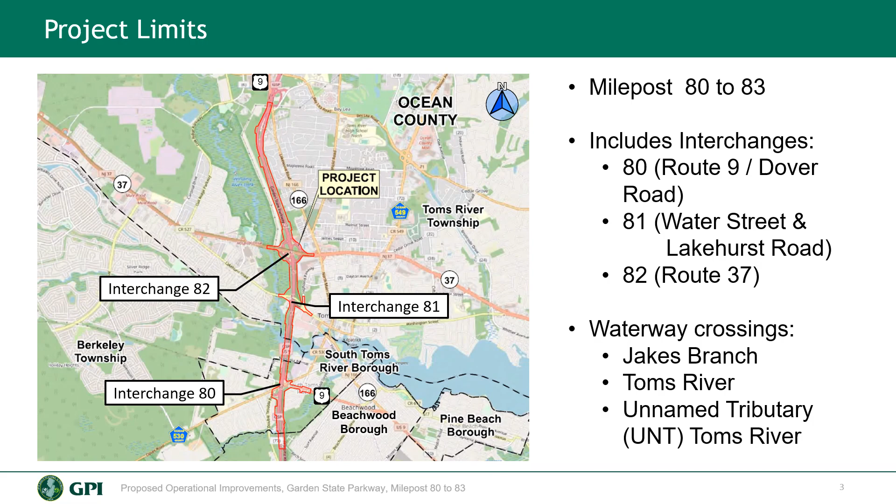The objective of this project for the authority is to improve accessibility, safety, and travel time along the Garden State Parkway. This is being achieved by providing full access to the Garden State Parkway at Interchange 80 with 2 new ramps that do not exist in the current condition, increasing the capacity and eliminating substandard weaving conditions of the Garden State Parkway mainline, and correcting substandard design elements that exist within the corridor.

The corridor has several needs in the existing condition. The Route 9 local road traffic combines with the Garden State Parkway traffic at Interchange 80 within the project limits and separates where the project ties in at Interchange 83. Local traffic needs to have a separate roadway from the main line of the Garden State Parkway. Congestion along the Garden State Parkway mainline, ramps, and local roads needs to be addressed to improve movement through the corridor. In addition, there are insufficient weaving lengths on the main line and between the closely spaced interchanges.

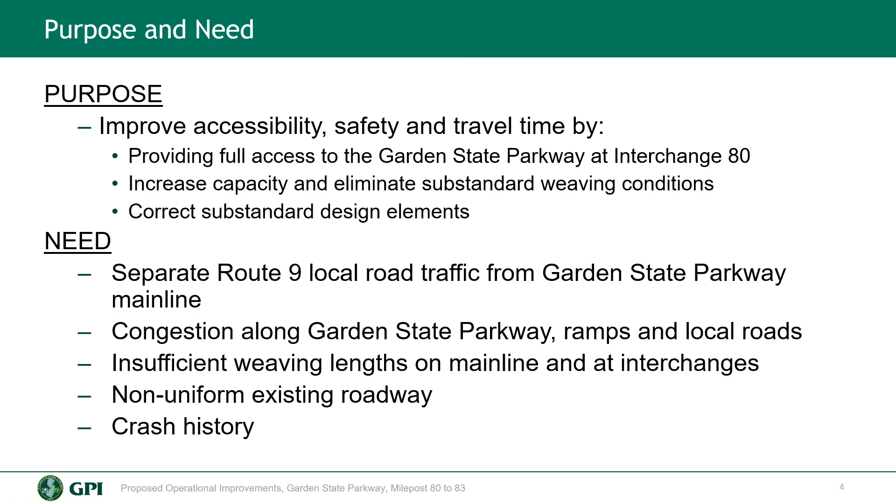Geometrically, the shoulders, median, and lane widths are inconsistent from the Garden State Parkway to the north and south. Lastly, the crash history in the corridor is above the statewide average, contributing to operational concerns. Continuing with the project need are the existing deficiencies that do not meet the design standards of today, since the corridor was originally constructed in the 1950s.

The shoulder widths are typically less than the authority's current standards and even non-existent at some locations. The roadway geometry and connecting ramps have several existing deficiencies, including stopping sight distance of vertical curves, cross slopes, and superelevation rates. The acceleration and deceleration lane lengths are insufficient between the closely spaced interchanges. Bridge clearances are deficient, including the vertical clearances under or over the Garden State Parkway and the width of the crossing roadways.

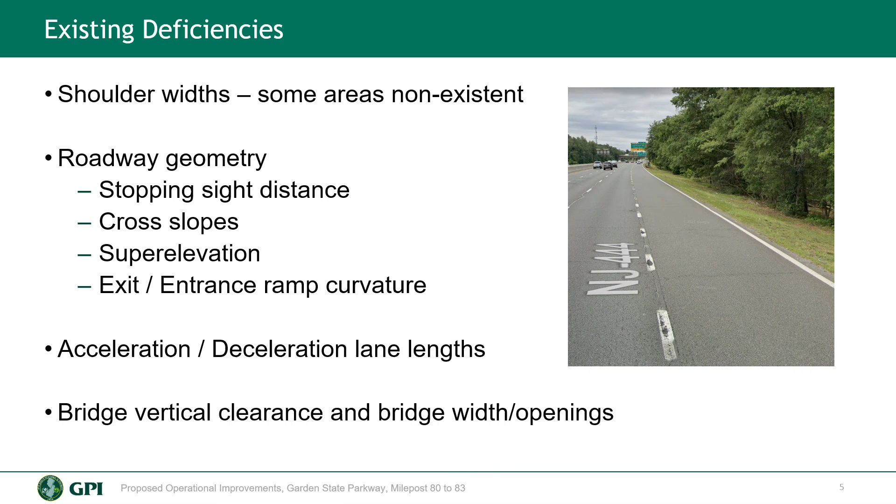The project team is actively coordinating with project stakeholders to account for other projects nearby to help contribute to the success of this project. There are projects underway led by a private developer, Toms River Township, and Ocean County that have been considered. Near Interchange 80, there are planned intersection improvements at Dover Road and Double Trouble Road for a nearby private development along Railroad Ave that are being coordinated.

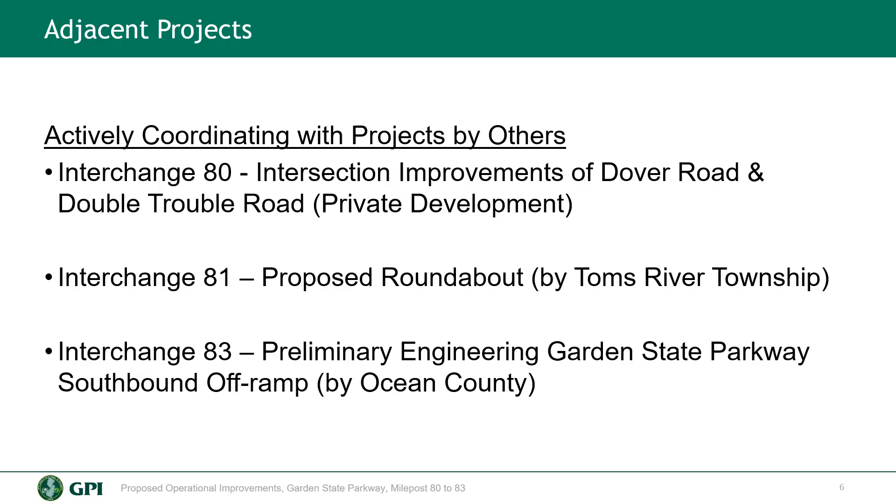At Interchange 81, there is a proposed roundabout being considered by Toms River Township at the intersection of Highland Parkway, Water Street, Lakehurst Road, and the Interchange 81 Parkway exit and entrance ramps. At Interchange 83, the project team is coordinating with Ocean County on a project in the preliminary engineering phase to construct a new Garden State Parkway southbound exit ramp to Indian Head Road.

Now for an introduction of the proposed improvements planned for this project shown on the overview map of the initial preferred alternative that has been developed alongside the other locally led projects mentioned earlier. The design team has prioritized operational and safety improvements and developed a design that includes separate collector-distributor roadways in each direction, extended auxiliary lanes, upgraded exit and entrance ramp speeds, widened substandard shoulders, and 2 additional ramps to complete the missing traffic movements at Interchange 80.

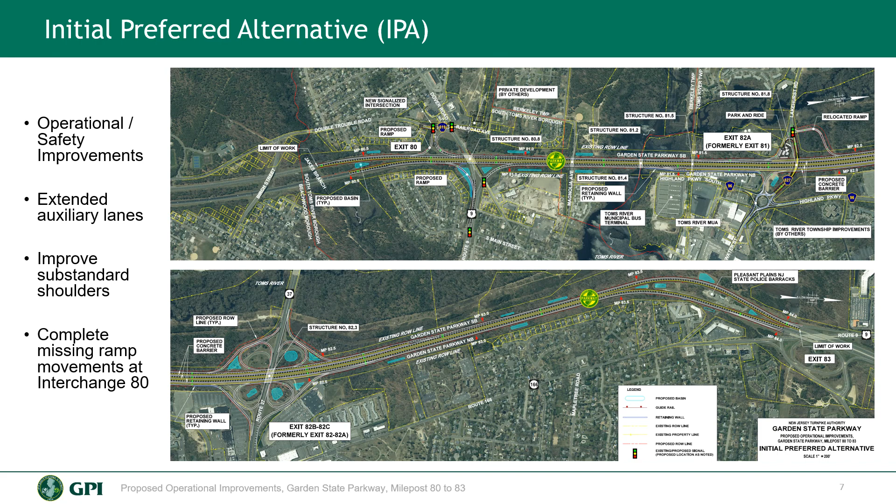One main goal of the project is to improve the Garden State Parkway to meet current standards. These include geometric improvements to roadway curvature, improving sight distance, rehabilitation or replacement of 11 bridges, guide rail replacement to meet current standards, and upgrades to signing, striping and lighting. Stormwater management, including 23 basins and 9 manufactured treatment devices, will be established to control site runoff.

There are extensive utility relocations required to construct the initial preferred alternative. The majority of these are located at the interchanges with the crossing roadways. Right-of-way acquisitions will be required, but minimized to the fullest extent so as not to significantly impact the local community. There are small or partial takings.

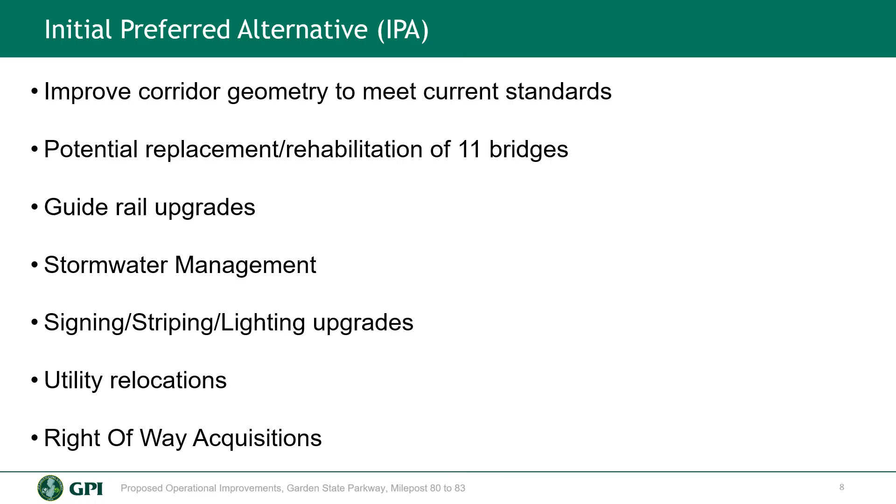These graphics show the proposed cross-section of the roadway in relationship to the existing roadway conditions. These are 2 representative sections within the project limits. The graphic at the top shows the area between interchanges 82 and 83. As you can see, the proposed condition widens to both sides of the existing roadway, providing for standard left and right shoulders, and an added 4th lane as an auxiliary lane to run continuously between interchange 82 and 83 ramps.

The lower section shows the roadway between interchanges 81 and 82, where the collector-distributor roadway has added lanes separated from the Garden State Parkway by concrete median barrier to improve traffic congestion and weaving on the main line. There is considerable embankment fill and pavement widening required on either side of the Garden State Parkway. The northbound collector-distributor roadway will have 1 through lane with 1 auxiliary lane, and the southbound collector-distributor roadway will have 2 through lanes with 1 auxiliary lane.

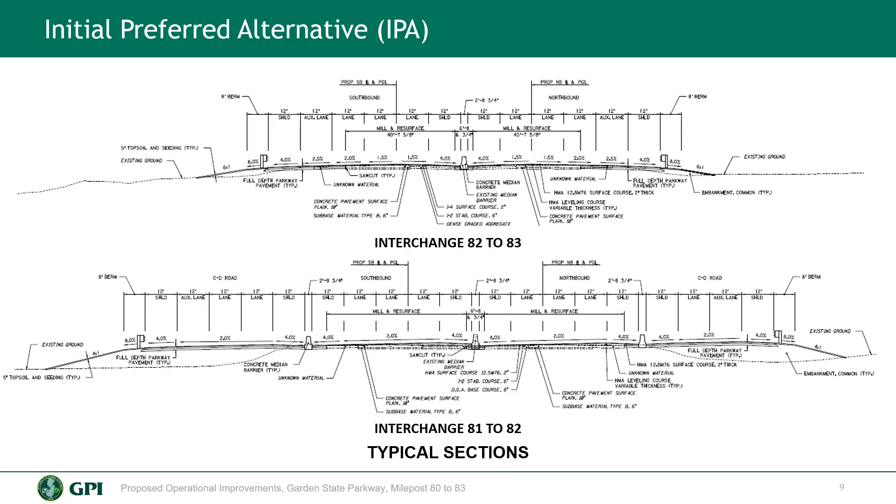In order to provide a compliant collector-distributor roadway adjacent to the Garden State Parkway main line, the interchange ramp numbering system will need to be modified within the project limits. FHWA's Manual on Uniform Traffic Control Devices, or MUTCD, requires that all ramps exiting and entering from the collector-distributor roadway utilize the same number, considering all the ramps as part of a single exit. For this reason, from south to north, the existing 81, 82, and 82A designations will now be 82A, 82B, and 82C in the final constructed arrangement. There will be no exit with the designation 81 in the future.

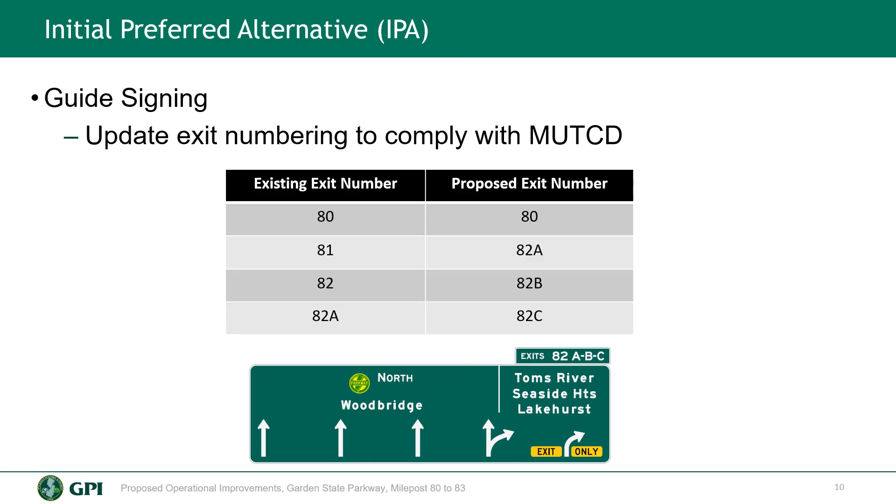Shown here are the proposed improvements at Interchange 80 in more detail. Along the northbound Garden State Parkway roadway, there will be a newly added northbound exit to Route 9 southbound to provide access to points east. This new ramp will bisect an existing stormwater management basin, which will be reconfigured to maintain its effectiveness. The existing northbound entrance ramp will be widened from 1 to 2 lanes to access the Garden State Parkway. These entrance ramp lanes will continue as auxiliary lanes and provide access to the mainline Garden State Parkway and to the collector-distributor roadway.

To improve the operation of the signal at the intersection with the northbound entrance ramp, Dover Road westbound will be widened under the Garden State Parkway to accommodate 2 travel lanes beyond the signalized intersection, thereby reducing the green time required for Dover Road and increasing green time for Route 9 northbound onto the Garden State Parkway.

Along the southbound roadway, a new southbound entrance ramp will be provided from Double Trouble Road to Garden State Parkway southbound. Patrons that are traveling on Dover Road westbound or Route 9 northbound looking to travel southbound on the Garden State Parkway will take the jug handle at Dover Road and Railroad Avenue, then make a left and travel south through the Dover Road and Double Trouble Road intersection, and finally make a left onto the new Garden State Parkway southbound ramp.

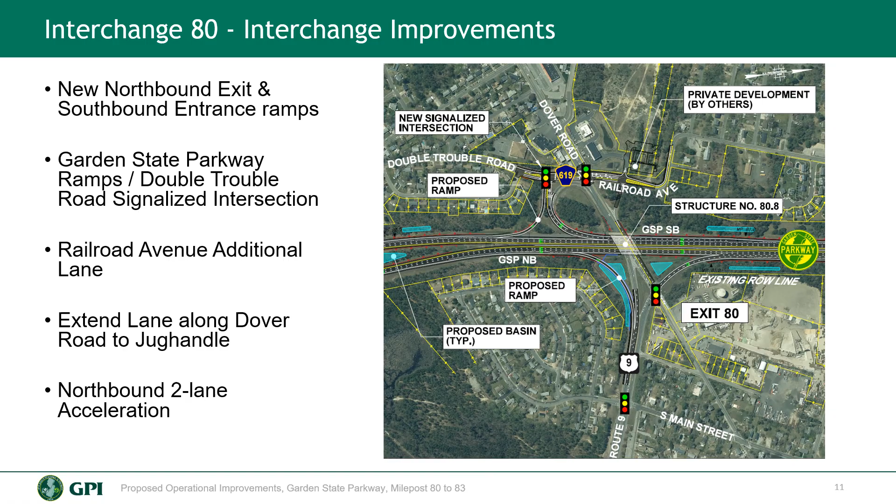At Interchange 82A, previously known as Interchange 81, the entrance and exit ramps will be accessed from the proposed collector-distributor roadways. Along the northbound direction, the exit ramp geometry will be improved to meet current design standards and tie into the proposed future roundabout to be constructed by Toms River Township. Similar to the existing condition, the northbound entrance ramp will continue as an auxiliary lane of the collector-distributor roadway that also will serve as the exit ramp for proposed Interchange 82B to the north.

The Lakehurst Road Bridge over the Garden State Parkway will be replaced offline to the north of the existing alignment to allow traffic to be maintained during construction. The existing Lakehurst Road Bridge will be removed.

Along the southbound side of the Garden State Parkway, the entrance ramp will be improved to meet standards at the same location, while the exit ramp will be relocated north of Lakehurst Road on a new alignment. This new location will allow the ramp to be improved to meet standards and not impact access to Water Street while improving the safety and operations of the interchange. The new ramp location will tie into Lakehurst Road at the existing signalized intersection.

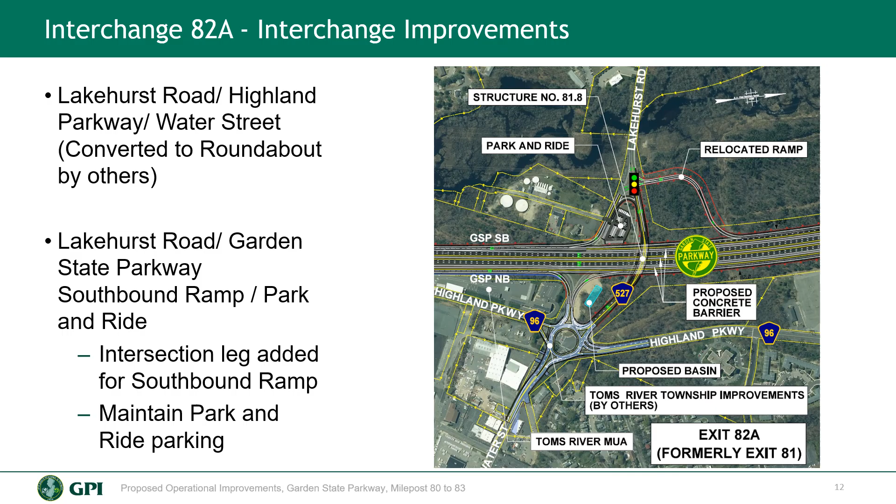The park and ride will be reconfigured due to the Garden State Parkway widening in this area. However, the existing number of parking spaces will remain the same.

At Interchange 82B and C, previously designated as Interchange 82 and 82A, the general configuration of the interchange will remain as a cloverleaf interchange. The Garden State Parkway entrance and exit ramps will be improved to current design standards and connect to and from the collector distributor roadway of the Garden State Parkway, eliminating the weaving with mainline Garden State Parkway traffic. Weaving lanes along the Garden State Parkway collector distributor roadway and Route 37 will be maintained or lengthened.

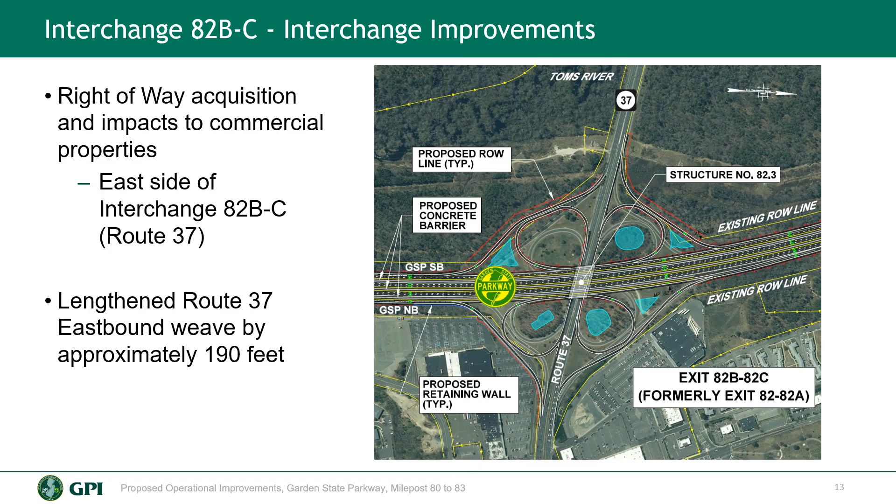Due to the Garden State Parkway main line being widened, shifting the ramps further out, some adjacent properties are anticipated to be impacted. These impacts will be minimized to the maximum extent possible by inclusion of a concrete median barrier and other mitigative methods.

There is a total of approximately 15 acres of right-of-way impacted on this project. The project will require approximately 8.81 acres as partial fee acquisitions. However, 7.3 of the 8.81 acres is publicly owned land. The project has limited its residential impact, with only 0.08 acres of residential property proposed to be acquired in fee and easements at Interchange 80 to facilitate construction of the 2 new ramps and associated improvements.

The project improvements impact environmental resources including freshwater wetlands, flood hazard, and riparian zones. The project is located within the CAFRA zone, which is Coastal Area Facilities Review Act. New Jersey's coastal zone encompasses tidal and non-tidal waters, waterfronts, and inland areas. A CAFRA permit will be required from NJDEP and will satisfy the environmental assessment requirements pursuant to New Jersey Executive Order EO number 215 of 1989.

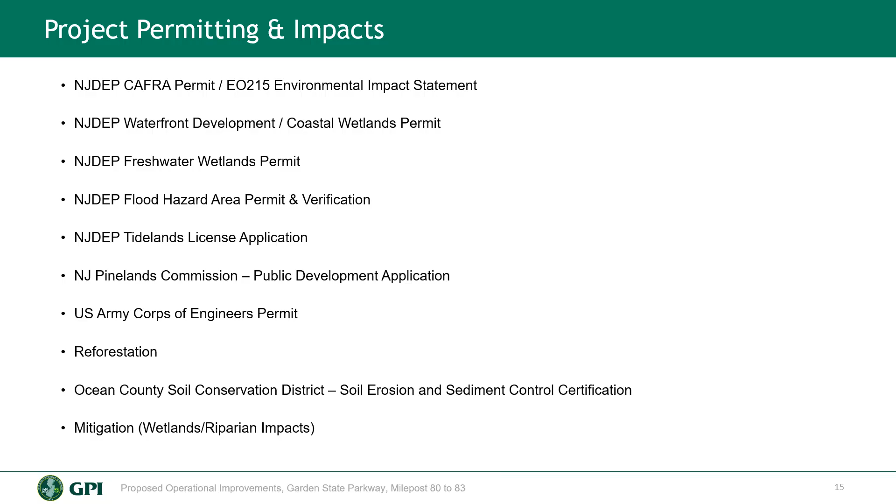The southern portion of the project falls within the Pinelands Management Area, and coordination with the New Jersey Pinelands Commission is being conducted. Reforestation and wetlands and riparian mitigation will be required as a part of this project due to the anticipated impacts. Lastly, an Ocean County Soil Conservation District soil erosion and sediment control certification will be required before going to construction for this project to protect the surroundings from construction activities and disturbances. Environmental impacts associated with the project are under investigation and permitting is underway.

The project is currently in the preliminary design phase, which is scheduled to be completed by the end of 2023, with final design to follow with an anticipated completion in 2025. Construction is anticipated to begin in late 2025 and with a duration of approximately 4 years.